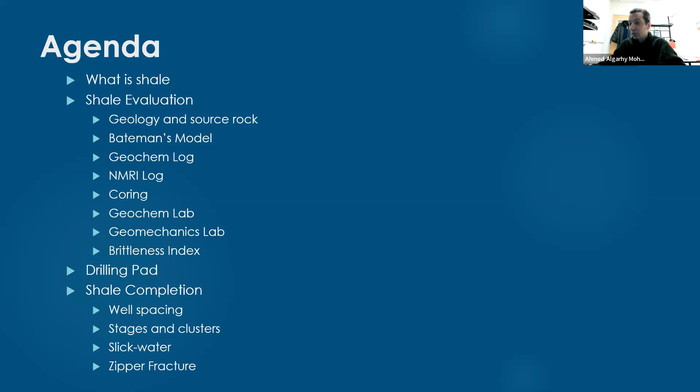Okay, so number one, what is shale? Shale is a sedimentary rock. You know, we have three types of rocks. I know there are many students from the Faculty of Science, and most of you already studied geology. So we may have igneous rock, we may have metamorphic rock, and we may have sedimentary rock. When we target oil and gas, we are focused on sedimentary rock, okay?

So shale is a dense sedimentary rock, and if it has organic content, long time ago, like hundreds of millions of years ago, it has a lot of organic deposits. Maybe it was forest, maybe animals, maybe bacteria, anything that we can consider organic content. So that deposition, I will call it source rock. This is the kitchen of the oil and gas, okay?

We know later this source rock will get buried under the ground. It will go deep and deep under the ground. The temperature and pressure will keep increasing over millions of years. So these organic contents will get cooked and will become oil or gas. Okay.

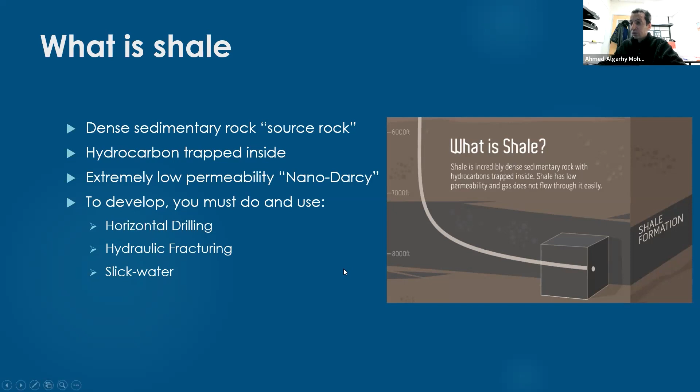Here at Marietta College, I used to teach lectures about organic shale, and organic shale is extremely important for the United States. Why? Because more than 50% of the oil and gas we are producing here in the United States, we get it from shale plays. Maybe the situation is different in Egypt, Saudi, North Africa or the Middle East in general, where most of our production we get from conventional reservoirs.

Most of the countries in the Middle East did some evaluation projects, but no country is producing in an economic way. It's just evaluation, because in the Middle East we are facing a problem of rare fresh water. We need a lot of fresh water to frack these wells. In Egypt, we have a problem with fresh water. In Saudi and Kuwait, they don't have enough fresh water. In Jordan, Libya, Algeria, they all have organic shale, but they don't have enough fresh water,

besides some other technical problems. And also in Saudi, the Gulf area, Libya and Algeria, they already have a lot of easy ones. In Saudi, you drill anywhere, you get easy oil and gas. So why waste your time and money developing shale? Maybe after 100 years you will do it. Okay.

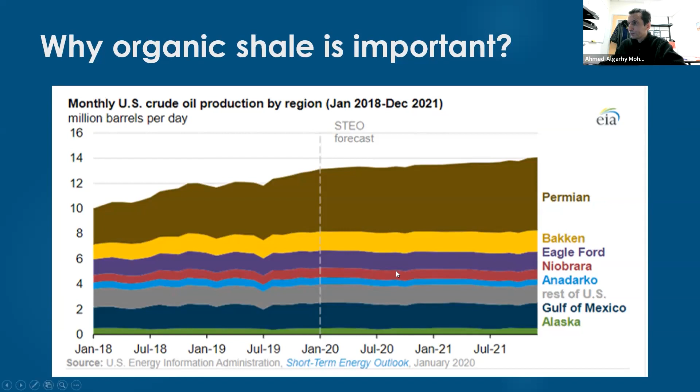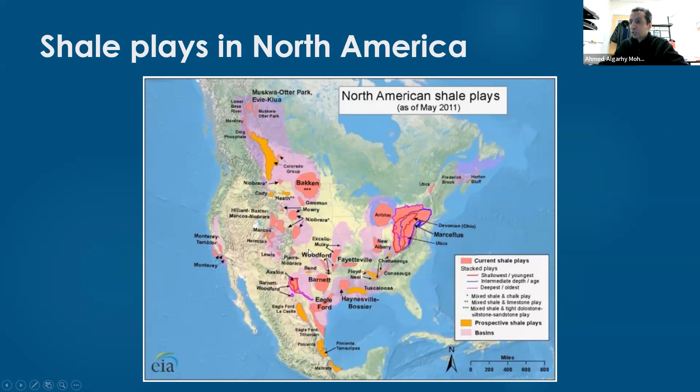Also, we don't have any problem with technology. We have the technology here in the US. We have frac fleets, many frac fleets. So we don't have any problem with the horsepower, no problem with the technology, no problem with engineers, with crews who will frack with fresh water. So in the United States, it's the right place to develop shale. We have almost everything. Okay.

Now let's discuss what is shale evaluation. Guys, in 2013 and until half of 2014, I moved from OGS, the training company in Egypt, the training arm of the Ministry of Petroleum in Egypt, to Khalda Petroleum Company. And I was lucky that I got involved in a project made by Khalda and Apache. They were trying to evaluate the first shale play in the Western Desert in Egypt. That play is called Amun Shale.

So I got involved with the exploration team, and I got very good experience with that, especially because it was in Egypt. Most of this work was done by Halliburton, and some other service companies did part of the work. So, the first thing we need to do to evaluate a shale play, and by a shale play I mean the formation or the layer that includes that organic shale.

The first thing I will ask myself: have I drilled any conventional wells before, and did these wells penetrate these organic shale zones or not? If yes, please show me these well logs. I need to see these well logs. So we ask to see something called quad combo. If you graduate and get a job with a service company or operating company in Egypt, you will find well logs.

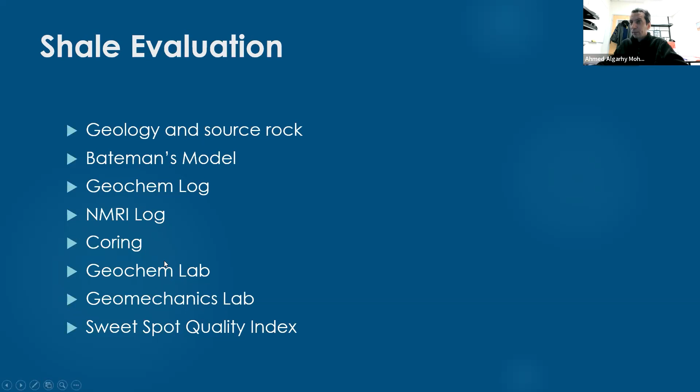I will cover this part, and then I will go to Bateman's model and geochem and NMR log and so on. So if I get the logs and talk with the geologists and petrophysicists, and they already told me where the source rock is, I may notice a high gamma ray in that organic shale. Guys, everybody knows that shale will have high gamma ray by definition, right? But I will expect to see extra gamma ray. Why? Because the organic content will have some uranium, and this uranium will add to the gamma ray.

Gamma ray is recording the emission of the potassium, of the uranium. So I will notice the uranium will be extra, because I'm getting some uranium from the shale itself and some uranium from the organic content itself. So I will see some extra gamma ray. I will also notice some high resistivity. Why? Because it has organic content. It has some hydrocarbon, and hydrocarbon will give you high resistivity. If there is water, you will see the resistivity will be very low.

But if you see high resistivity, most likely there is hydrocarbon, but please don't get tricked. You need to check the porosity first. Because if the porosity is very low, you will see high resistivity, not because of the hydrocarbon, but because of the low porosity. So you need to check both of them.

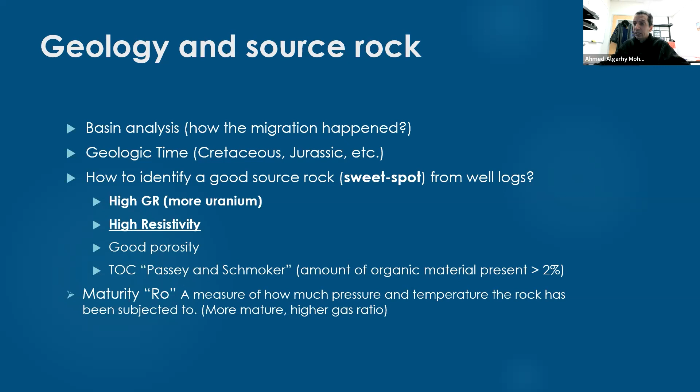This is my dear professor, Mr. Richard Bateman. Richard Bateman has a master's degree, so I call him Mr. Richard Bateman, not Dr. Richard Bateman. He's a British guy who used to work for a long time for GUPCO in Egypt, for British Petroleum in Egypt, before BP sold this company to Dragon Oil. So a long time ago, during the 70s, Richard Bateman used to work in Egypt for BP.

Richard Bateman taught me 2 classes at Texas Tech University during my PhD, and one of the very interesting things he introduced was a visual way to see what is inside the shale. Look to the left, look to the mouse. The 9-component model. What is inside the core? This is the solid stuff: the organic matrix, the inorganic matrix, the clay solids. Inorganic matrix like sand, limestone or dolomite, and the organic content, let's say the kerogen. All these things are solids.

Look to the borders. We have the fluids. I may have oil. I may have free gas. I may have adsorbed gas. I may have clay-bound water. I may have capillary-bound water. I may have free water. So 6 fluids and 3 solids. If you consider these 9 components, you can get a good idea about the bulk density.

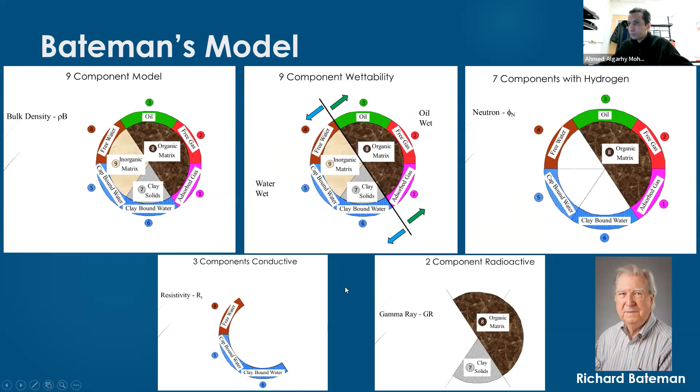This tool does a lot of data mining, a lot of machine learning, a lot of artificial intelligence stuff, to translate the aluminum and tell you exactly what mineral includes that aluminum. Because maybe you will have more than one mineral including aluminum; different minerals may have aluminum. So the good thing about this tool is that it will translate the aluminum or barium or carbon or calcium to the right mineral, which is very helpful.

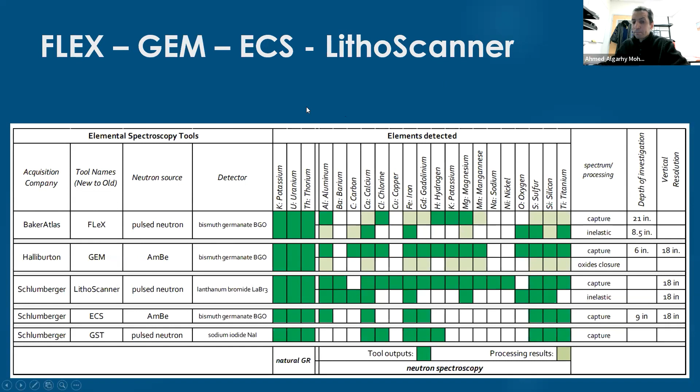A second important tool is magnetic resonance imaging. Magnetic resonance imaging is a tool we got the idea for from a medical application. Guys, when someone, let's say, gets his arm broken, he gets a recommendation to do an X-ray, because the X-ray will see the bone inside your arm, but it will not see the muscles or the fluids surrounding your bone. The magnetic resonance imaging, or MRI, will do the opposite. It will not see the bone, but it will see the fluids inside your arm, for example.

If someone has a tumor, when someone gets a pain in his brain for a long time, and he goes and checks, and the doctor tells him that he has a tumor, like a damaged piece of the brain, and they need to do a surgery to remove it, for example. So how can we see inside your brain? I can do magnetic resonance imaging, MRI.

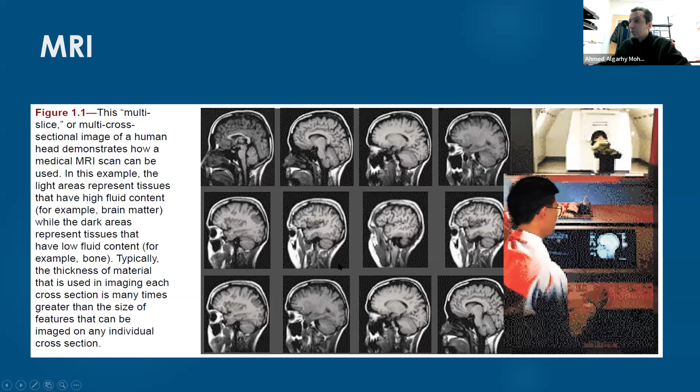So we copied this application, and we use it in our oil and gas industry, mainly when we evaluate shale. Magnetic resonance can tell you something about the quantities of the fluids inside the rock, about the properties and the type of these fluids, and about the size of pores inside that formation. If you know the size of pores, you can get an idea about permeability.

What is really magic is that you can know what is movable and what is not movable, what you can produce from these fluids and what you cannot produce, and it will stay forever inside that reservoir. Guys, the reservoir now, I'm talking about shale. So the reservoir here is the shale formation, not a conventional reservoir.

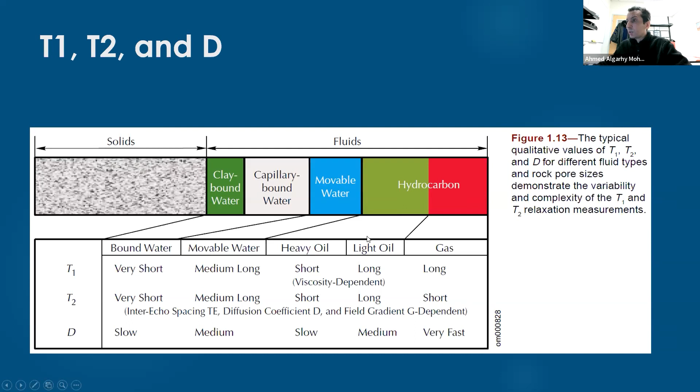So if I use a magnetic resonance tool, I can get an idea about the fluid inside the formation. I can identify whether this formation includes gas or light oil or heavy oil or movable water or bound water. How will I get this? By measuring T1, T2, and D, relaxation time and diffusion. Based on the analysis of T1, T2, and D, I can get exactly the fluid, and also a good idea about the permeability and porosity, and what is movable and what is not movable. What else is important during evaluation?

And something interesting, when I teach these things here at Marietta College, some students say, hey, we attended jobs at shale plays, but we have never seen them doing coring or doing geochem log or doing NMR log. Why? The answer is they are attending fracking jobs in places where they already did this evaluation a long time ago. So maybe 20 years ago or 10 years ago or 5 years ago, this evaluation was already done.

And now we know exactly what is inside this shale formation. So there is no need to waste your money in doing evaluation again. Just drill horizontal wells, frack it and produce, and that's it. Okay? So after you do the full size coring, what do you need to do? I will invite two companies. One of them will do something called Rock-Eval. They will do pyrolysis testing. And I will explain what pyrolysis testing is.

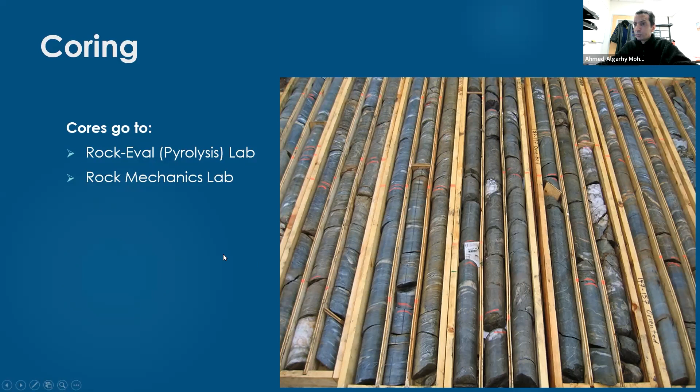Okay. So number one, the Rock-Eval company will measure something called S1 and S2 and S3. What is S1? S1 is the amount of free hydrocarbon, gas or oil, in the sample. This is free hydrocarbon. S2 is the amount of hydrocarbon generated through thermal cracking of non-volatile organic matter.

Then you will plot something called the oxygen index and the hydrogen index, and you will do something called the Van Krevelen diagram. And I need to know if these fluids, these hydrocarbons, are type 1 or type 2 or type 3 or type 4. Guys, I want to know whether, when I produce from this location, I will produce oil or condensate or gas.

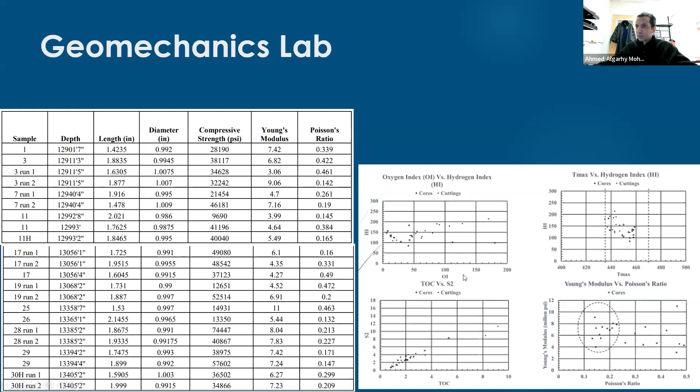Okay, and here we see some stuff from the pyrolysis testing from the Rock-Eval company, and the last one at the bottom right, this is Young's modulus and Poisson's ratio. This will give you an idea about the brittleness index. Okay.

So whenever I have, this is this work presented by a guy who used to work for Halliburton, maybe 10 years ago, or maybe 15 years ago. His name is Richard Rickman. We call this the Rickman equation or Rickman model, okay?

And here, I need to know, based on the Young's modulus I measured and Poisson's ratio I measured. For sure, if you are measuring this using the DTS and DTC, using the sonic, this will be dynamic Young's modulus, and I need to convert this dynamic Young's modulus into static Young's modulus. This is why I will be happy if I have a report from a rock mechanics lab, because what the rock mechanics lab will measure will be the static Young's modulus. And this is what I will use in my fracking design.

Again, the brittleness and understanding of the Young's modulus and Poisson's ratio you have will help you select the right completion strategy. It will help you select the right frac fluid you will be using. If you have high Young's modulus and low Poisson's ratio, you can use slick water, and I will explain what slick water is very soon. If the brittleness index is very low and Young's modulus is very low, like less than 1 million psi, for example, I must use cross-linked gel or hybrid frac fluid, like cross-linked gel and slick water in stages.

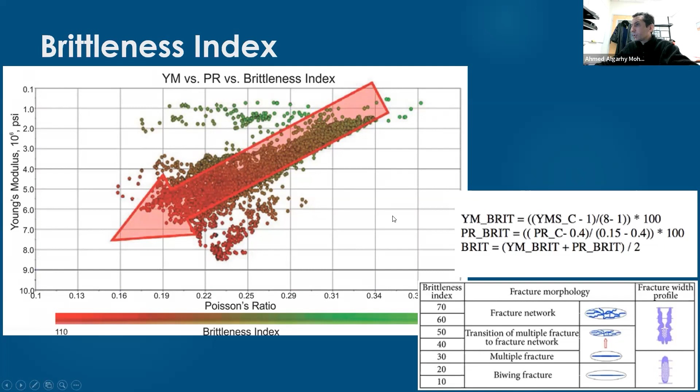So this information is from the Western Desert in Egypt. We were trying to evaluate the Amun shale formation. There are a lot of good things about it. It will produce oil or condensate. We have a high brittleness index. We have a conventional behavior, which is some tiny sandstone formations trapped inside the shale, and these sandstone formations include a lot of condensate. We call this conventional behavior.

But the main problem with that formation in the Western Desert is that it has very low reservoir pressure. If you have low reservoir pressure inside the shale, this is bad news. And this is why we get a lot of debate about whether this formation is good or bad to develop. Guys, whenever we say development, always think about evaluation, but also don't forget to think about the oil price. Oil price will be the key. If the oil price is very high, I may invest money in a low quality shale play, for example.

Let me tell you something about the drilling pad. When we drill shale, I need to drill more than one well from the same location. That location I call the drilling pad. I may drill 2 wells, 3 wells, 4 wells, maybe up to 12 wells from the same place. That place, look at the mouse, I will call it the drilling pad. Do you know the mouse pad? This is my mouse pad. So a drilling pad is a small location, and we will drill more than one well from that location.

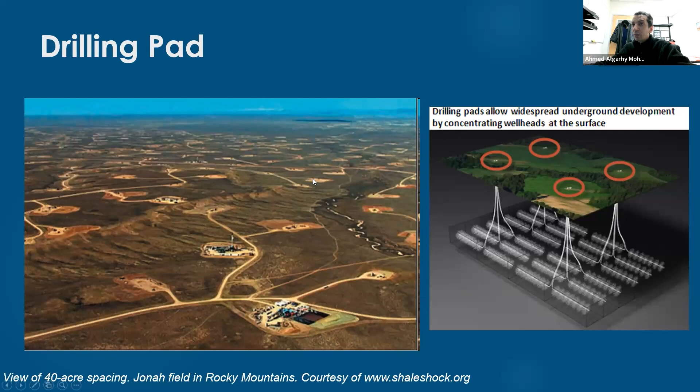It's very interesting when you hear that the rig can walk, as if it has legs and feet. Actually, it is not legs and feet. We just slide it. And this sliding takes hours. Maybe we need like 8 hours to slide the drilling rig a few feet, because of safety; we may collapse the drilling rig if we move it faster.

Now let's get a general idea about shale completion. Guys, in this lecture, I will try to introduce a lot of stuff to you. And starting from the 2nd and 3rd and 4th lecture, I will repeat these things again with more and more details. Okay? So let's talk about shale completion.

I'm not sure if this will work or not, but let me try. See?

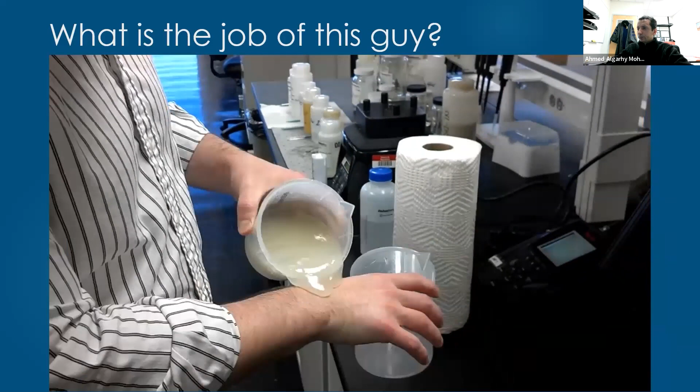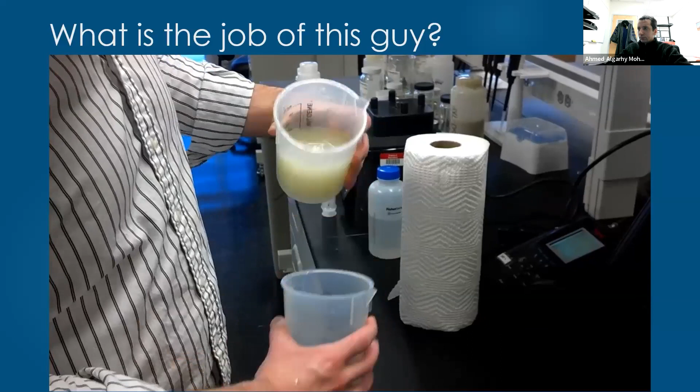Guys, the job of that guy, we call it fluid technician. Why am I showing you this? Because this is the frac fluid we use with sandstone formation. This is a conventional frac fluid. If you go to the Western Desert in Egypt and attended a frac job with Khalda or with Badr El-Din or with Agiba, for example, and you were fracking a sandstone formation, you will find them using a fluid like this.

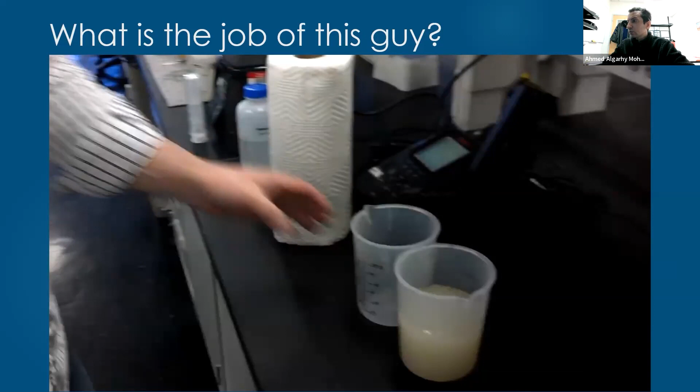Okay, this fluid is fresh water with KCl, with guar. Guar is something similar to starch, and we use guar also in a lot of foods. And we use something called cross-linker, and we use a lot of chemicals to get something like this.

So a long time ago, I know that the service companies were very happy because if the frac fluid is expensive, they will make a lot of money. No problem. You will order a lot of stuff and they will get it to you, and they will get all the money from your pocket, right?

So this gentleman, his name is George Mitchell. George Mitchell was born here in the United States, but his dad and mom were from Greece. They were immigrants from Greece. So George Mitchell had a little company in the Barnett Shale, and Barnett Shale is south of Dallas, and Dallas is a big city

in Texas State. So George Mitchell got a crazy idea, and he said to his engineers, I wanna inject just fresh water at a very high rate like 100 barrels per minute. If you attend a conventional job in sandstone formation in Egypt, you will find they are using a rate of 20, 25, 30 or 35 barrels per minute. So this is the maximum they are using. Maybe they will not go beyond 35 barrels per minute.

But George Mitchell tried to use 100 barrels per minute, and this was really a crazy and challenging idea. Some of his engineers told him, hey, to inject 100 barrels per minute, we will generate a lot of friction inside the tubing, and we cannot do that. So again, the idea is he wanted to inject just fresh water, no chemicals with it. They wanted to inject something cheap compared with the conventional frac fluid you have seen in the previous video.

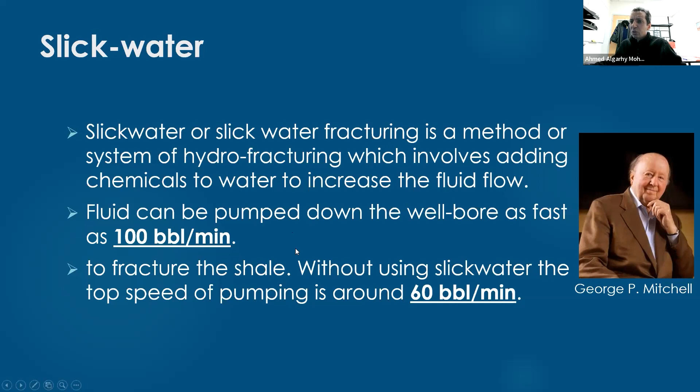So all of us until today, we should say thank you to George Mitchell, because he introduced this idea. And almost all the companies here in the United States now are using slick water. All companies adopted slick water in fracking shale. If your shale is ductile and not brittle at all, maybe slick water will not be an option, but we will discuss this later.

Okay, so after knowing what is slick water, let me tell you something about what is zipper frac. Guys, zipper in Arabic means susta. So the zipper you have in your jacket, for example.

So we faced an operation problem, and a zipper frac solved that problem. The problem is I'm using two companies in the location. A company does pumping, like they pump the frac fluid, and the second company does plug and perf. They perforate and set a plug between each stage.

So this is well number one, this is well number two, and here I will frac this part first. I will call it a stage. Then I will have a little space between the first stage and the second stage. Then I will do the third stage and so on until I frac all the horizontal lateral.

Okay. So whenever you do this and you have two companies working in the location, one for pumping, one for fracking, and one for plug and perf, they do that using a wire line. Okay, they are two different companies. So you may have, let's say, Schlumberger for fracking or Halliburton for fracking, and you have a different company for wire line to do a plug and perf.

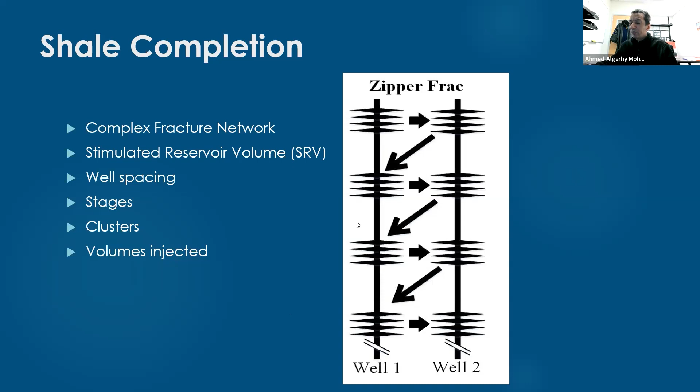Okay, so look at this picture. It seems like this is stage 1, 2, 3, 4. It seems like there are 4 clusters, like 4 fractures in one stage. Maybe one well includes 10 stages, or 15 stages, or 20 stages, and maybe one stage includes 5 clusters or 10 clusters. It is your design. Okay. Also, I need to discuss the volume I will inject for every single stage. Okay.

So I already defined what is a zipper frac. I will tell you what are the benefits of zipper frac, guys.

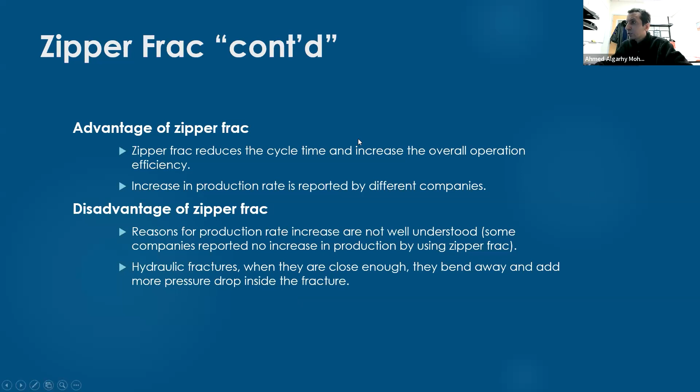Okay. So whenever the hydraulic fractures are close to each other, if we have 2 horizontal wells beside each other and the stages are close to each other, sometimes if the fractures get closer, the stresses get something called stress shadowing. So the fractures start to bend. And this bending, because of the stress shadowing, may cause pressure drop inside the fracture. This is a problem, but we do a lot of simulation to minimize the impact of this. Okay.

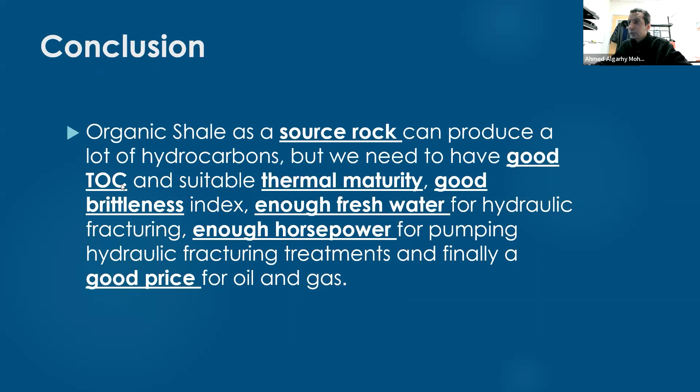Finally, this is the conclusion and the end of today's lecture. So the conclusion is, now I am evaluating the source rock. I'm evaluating the organic shale, and this is a source rock. Before, I was producing from the conventional reservoirs, meaning after the hydrocarbon migrates from the source rock. Now I am developing, fracking and producing from the source rock itself, the organic shale itself.

I will be happy if this source rock includes good TOC, total organic carbon. Okay. Also, I would be happy to understand the thermal maturity, so I can do my calculation. Am I having oil or condensate or gas? I would be happy if I have good brittleness, if this formation is brittle, so it will be successful in fracking, easy to frack. Also, if I have enough fresh water in that place for hydraulic fracturing. Also, if I have enough horsepower, because in some big jobs I may use 40,000 horsepower.

Guys, I will tell you something very funny. 10 years ago, only Halliburton and Schlumberger were fracking in Egypt. No other company, just two companies. If you collected all the pumps they were using for fracking, it would not be 40,000 horsepower.

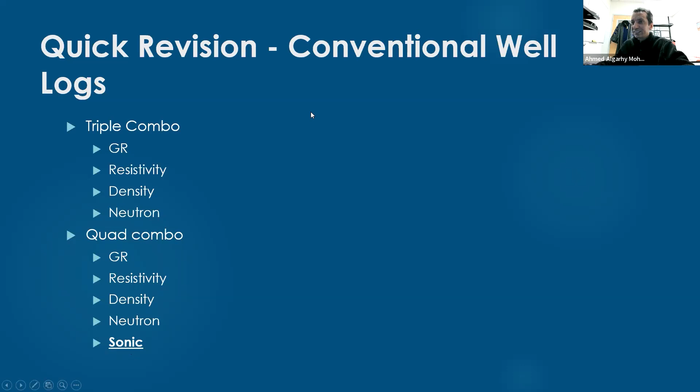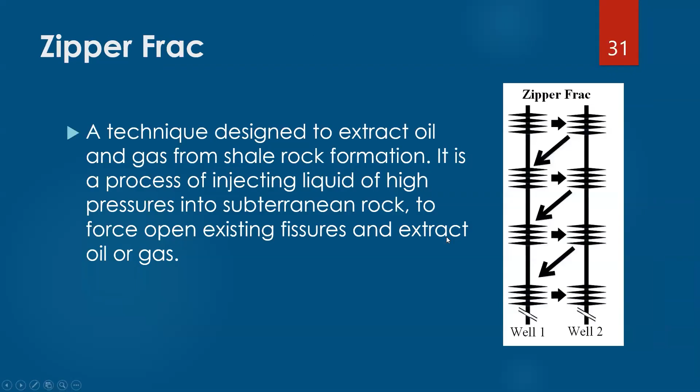Yes, thank you. Now, can we or do we need to inject proppant while performing the hydraulic fracturing for shale or organic shale completion? Yes, we inject proppant, but the amount of proppant we are using will be different based on my understanding of the mechanical properties of the formation. For example, if I have a brittle formation, I will inject a smaller amount of proppant. If I have a ductile formation, ductile shale, I need to use more proppant. And most likely I will use smaller proppant.

I have a lot of proppant in my office. You know, I'm teaching hydraulic fracturing, so I have a lot of samples. So this powder, these little things, we call it proppant. The proppant I will use with shale is a very small proppant. We call it 100 mesh. Most likely, I will use that 100 mesh proppant, but this is not a rule of thumb, this is what is common. So the answer is yes, I will use proppant, but the amount of proppant and the size of proppant will be different based on the case.

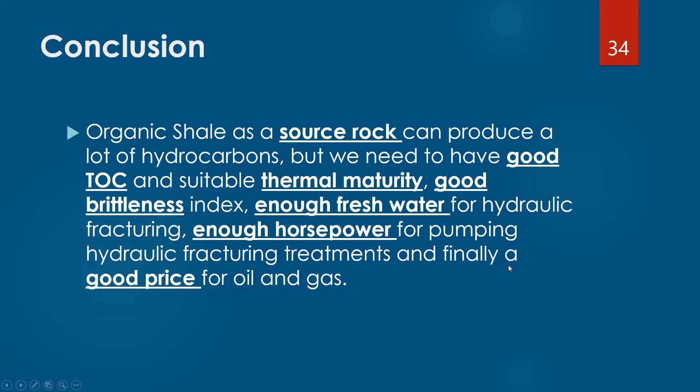Great. We have another question. Can we make hydraulic fracturing with foam in shale? I believe there is no problem to do it. Mainly we use foam because we are facing a low pressure reservoir. So if you have a low pressure reservoir, it is recommended to use foam. I don't see any reason that we cannot use foam in shale if I have the same problem of low pressure. If that shale has low pressure, I may use foam for it.

But what I can say is this is not common. What is very common is that we are using slick water. You can say 95 to 99% of the shale we are fracking, we are using slick water. Just water with KCl and friction reducer. That's it.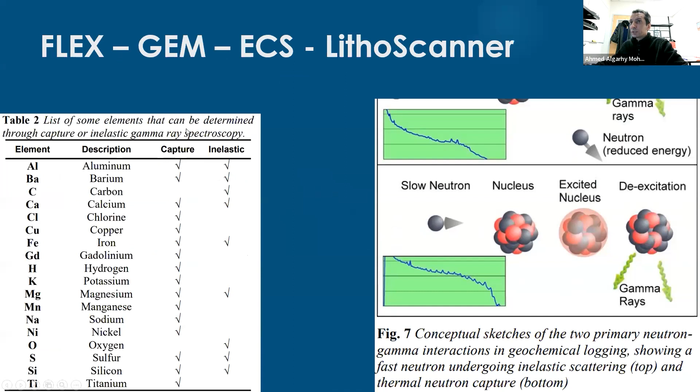Okay, thank you. Now, our last question for today. Can you please briefly re-explain the geochem logging? Okay, geochem logging. So the geochem log, as I mentioned, is a very smart tool. We are using a source of neutrons, and these may be fast neutrons or slow neutrons. This neutron source will go and hit the elements inside the formation. Whenever I hit that element, I hit the nucleus of that element, and I will read the gamma ray emitted from that collision.

So the neutron from the source in my tool will go and hit the nucleus of that element, and I will record the gamma ray emitted from that nucleus during the de-excitation. It's like you hit something, and it starts to vibrate, and over time it will relax. So you excite the nucleus, and while relaxing it will emit some gamma ray. The tool will measure this gamma ray, and it can differentiate between the gamma ray emitted from aluminum, barium, calcium, and later the tool also can translate this element into a mineral.

And this is the most important part. The tool will tell you how much aluminum or barium or carbon or calcium or whatever the element. But what is more important is that the tool will translate this, based on special techniques and data mining techniques, into a mineral. Then it's like you got a sample from the formation and analyzed it in a chemistry lab, and they tell you there's this amount of quartz, limestone, dolomite, anhydrite, different types of clays, and this amount of organic content, and so on.